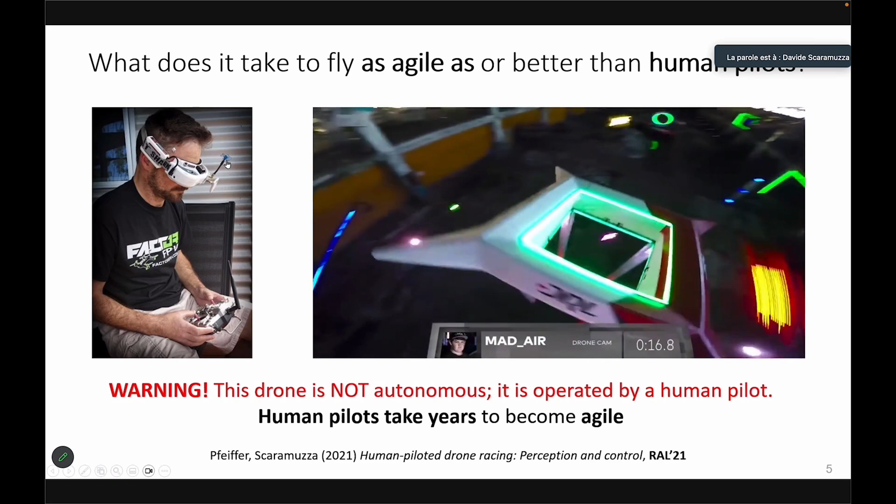So what is it that we try to do in my lab? What I try to do is understand what it takes to fly autonomous drones as good as, or even better than, human pilots.

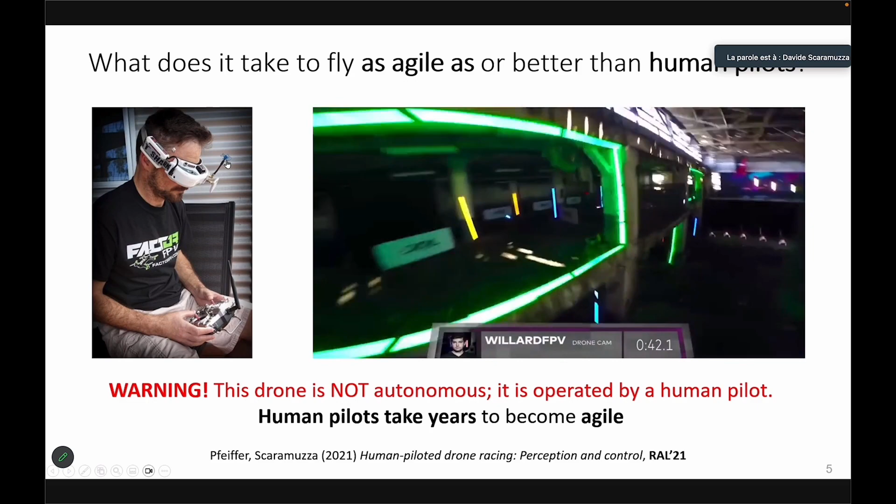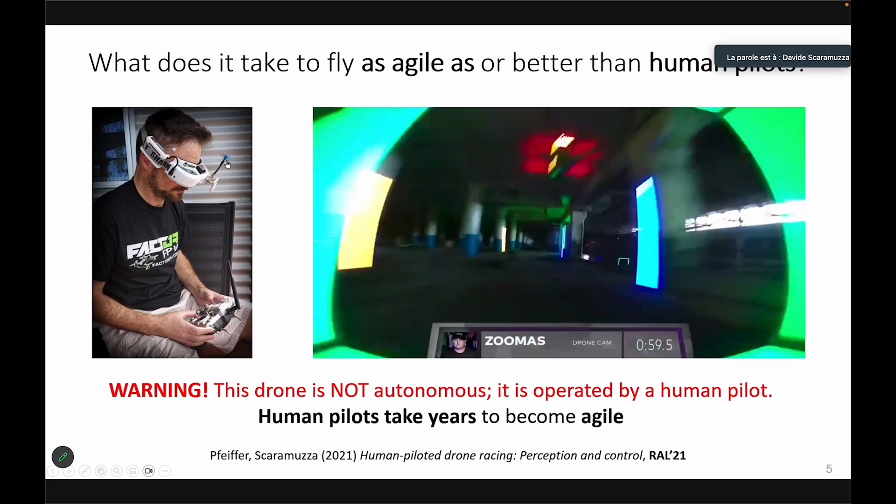What we see in this video is not an autonomous drone, but a drone piloted by a human. Human pilots navigate drones vision-based: they put a camera on the drone that transmits low resolution video, the brain processes the information recorded by the camera, and then sends control commands to the fingers that act on the joystick.

Now, what is interesting is that human pilots take 3 years to achieve the skills that you just saw in this video.

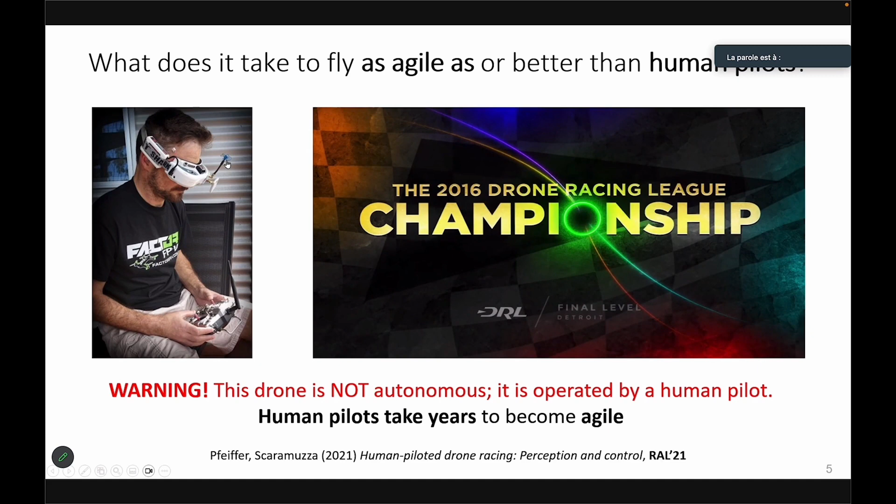Now, we thought that human pilots were fast simply because of their reaction time, and we were wrong. In fact, the average reaction time of the best human pilots is about a quarter of a second, 250 milliseconds. That's quite a lot of time, 150 milliseconds of which is the time it takes to go from the latest sensor input to the control commands being issued.

How do you measure this? You quantify the reaction time of extraordinary pilots using high-speed cameras, and this was published in the paper you see here below.

So our best autonomous vision-based algorithms are 10 times faster than experienced human pilots, but human pilots still beat the machine. Why? Because humans are still better than machines nowadays at making decisions in complex situations.

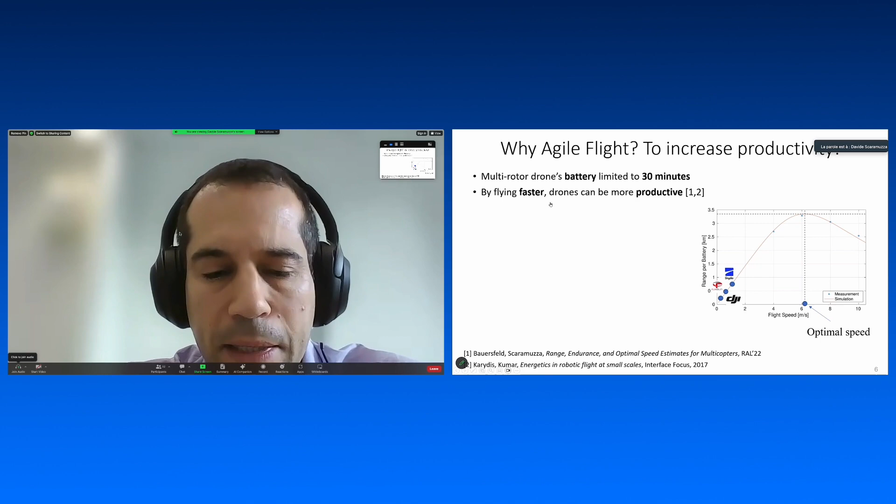For example, the average inspection of a structure requires swapping the drone's battery 50 times. If you can fly the drone faster, you only need to swap the battery 5 to 10 times. Meanwhile, racing drone pilots sit on the opposite side of this curve, because they're not maximizing productivity, they're minimizing net battery use for speed.

Nevertheless, I believe that through our research, we can push these things forward without manual intervention, and that's why we've worked over the past years to make progress on this.

Which applications will benefit from more agile drones? Many applications. First of all, search and rescue, because any time we can save can save lives. But also exploration and inspection - these are applications where it's important to increase drone productivity. Also forest management: more and more drones are being used to inventory forests, measure diameter and density, draw perimeters to avoid deforestation, and even distinguish tree types.

Also personal air vehicles - there are two big companies working to professionalize the field of passenger air transportation, and we need to fly fast to increase productivity there. And also space: according to NASA, their helicopter that will fly on Mars by 2030 needs to fly for 20 hours, and in order to do so, it will need to fly fast.

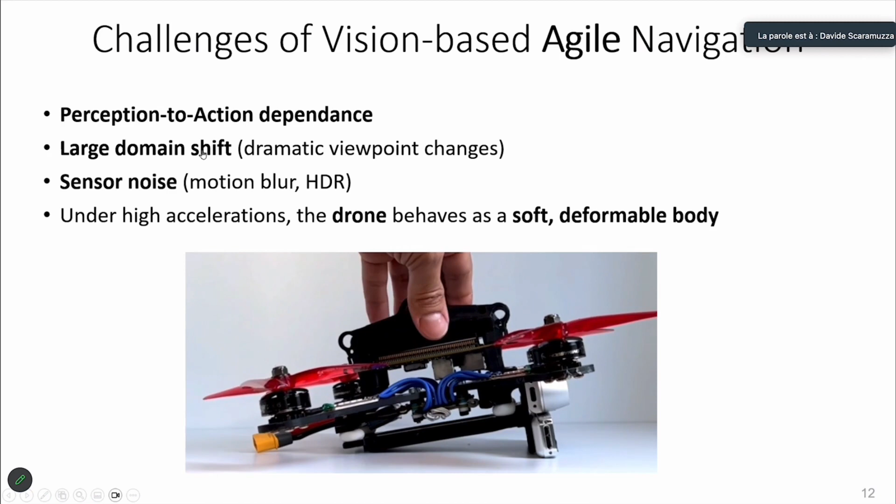Overall, many people think that a drone is a rigid body system, but this is not convenient to assume. Actually, a drone is a soft robot under high acceleration. Why? Because to isolate the vibrations between the motors and the cameras, we need to use soft mounts, like you see in this picture here. If you push the drone—and this is a recipe to simulate the accelerations the drone will experience when flying super fast—this will cause deviations in the calibrated extrinsics between the camera and the body frame.

And these systematic errors in the calibration, which is impossible to model perfectly, can cause errors of up to 2 meters. So there are many challenges you find with obstacles and perception.

Let me show you a video of drone racing in our arena. So actually, to do the experiments for this talk, we had to build an arena.

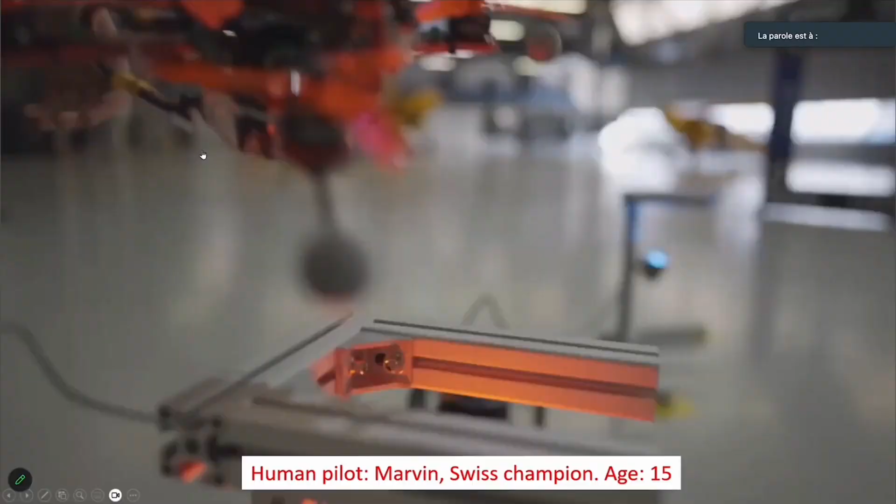So as you can see, the sport is very challenging because you need to push the drone to its limits. Eventually we will crash, because if you don't crash, it means you haven't pushed it to its limits. That's also why it's very difficult to do agile drone research: we crash many times.

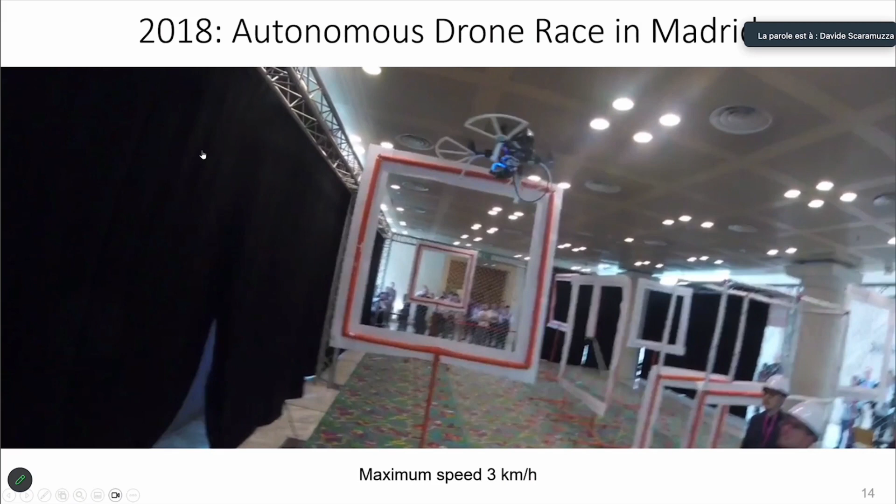We started working on racing in 2016, but only in 2018 did we reach something considered the world's best in terms of autonomous drone racing. In fact, in 2018 we participated with IROS's autonomous drone race summit in Madrid, and at that time our maximum speed was just 3 kilometers per hour. Nevertheless, it was faster than the other teams.

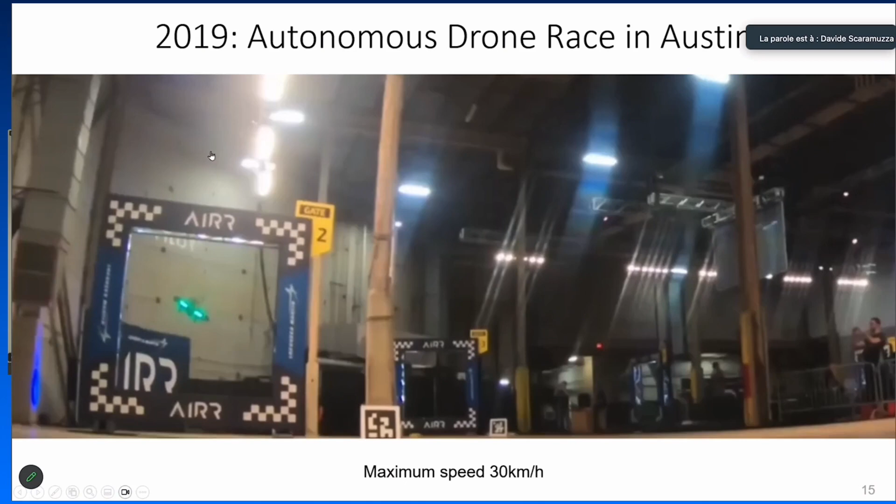One year later, as a team we participated in the autonomous drone racing challenge Alpha Pilot in Austin, Texas, where our maximum speed was 30 kilometers per hour. So in just one year, we were able to improve the speed by a factor of 10.

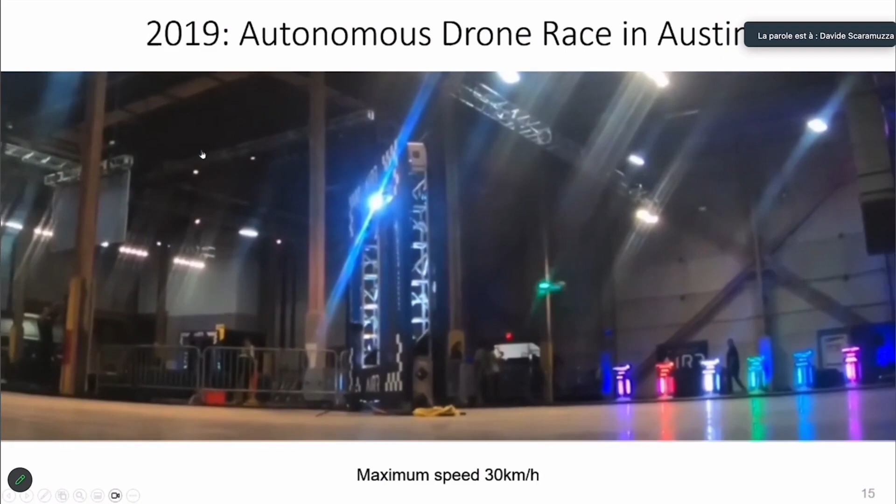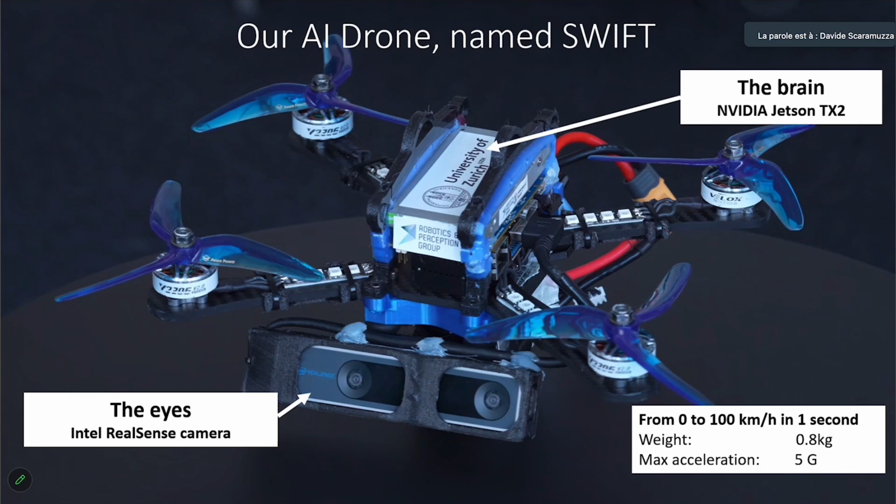But we realized that we were still very far from human pilot performance, and there are many reasons why. First of all, we were not using components that are used in real drone racing competitions. So we reached out to expert drone racing pilots and asked what specifications we needed to build a truly agile autonomous drone. We call this drone system Swift.

It's about 20 centimeters in diameter. It uses an NVIDIA Jetson TX2 as a brain and an Intel RealSense camera as the eyes. Consider that drone pilots, when they navigate using vision, only use one camera, so Swift will also be using only one camera, to match the same competition-based experience.

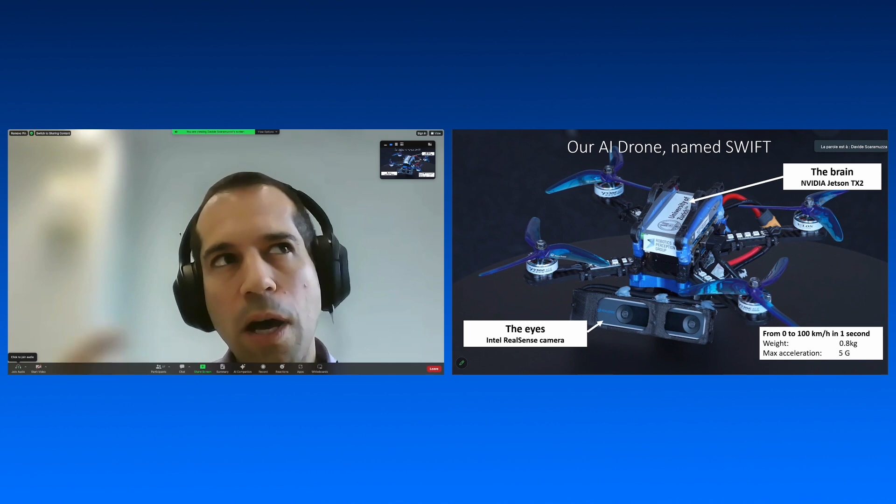Swift is very agile. It can accelerate from 0 to 100 kilometers per hour in less than one second, making it faster than a Formula 1 car, which takes 2.6 seconds. Swift can also reach accelerations up to 5 Gs, which is much more than what astronauts experience when launched to the International Space Station, about 1.5 Gs.

But besides the hardware, what actually made the difference was the software. We had to rethink the entire pipeline completely. Before, the pipeline was designed as perception, then planning, then control, and we had to change everything.

So let's formally define the autonomous drone racing problem. What is autonomous drone racing? You want to find the control inputs that optimize the flight time through a series of gates to be passed in a given order. So what you want, for example, is to minimize the lap time, subject to several constraints, like system dynamics, input constraints, state constraints, physical constraints, and, very importantly, perceptual constraints.

Why perceptual constraints? Because you want the flight to be vision-based, so you can only fly trajectories that facilitate the perception task, whether it's using perception for detecting the gates, and also because you want to pass through the gates, so you constantly need to make sure that the camera faces the gates over time. But as I told you before, there are sensing and motion blur threats, so we can alleviate them if we actually plan trajectories that reduce motion blur and obscured views.

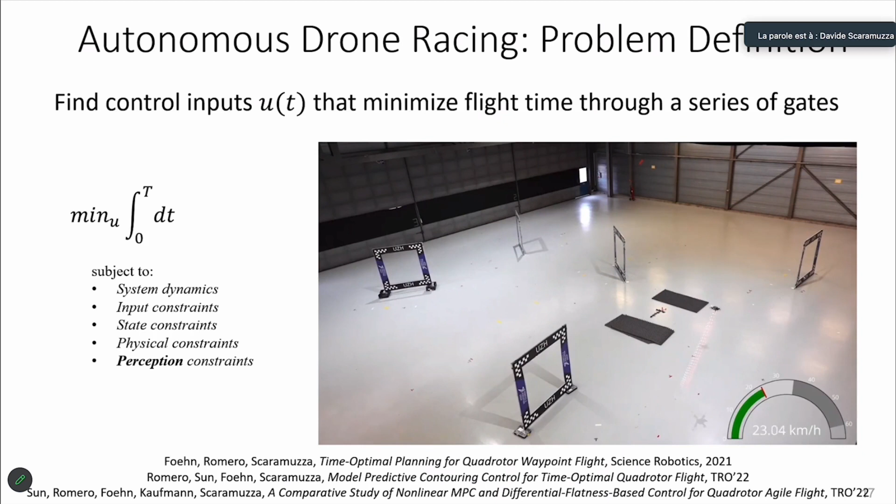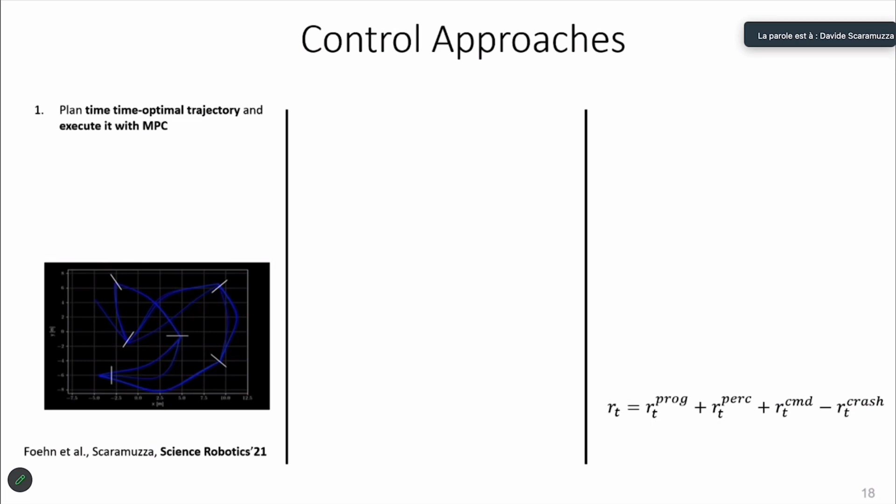When we started working on the autonomous racing problem, we started working not on neural networks, not on machine learning, but actually on standard classical things, on actual control theory. We thought of solving the problem by components, from speed planning and so on.

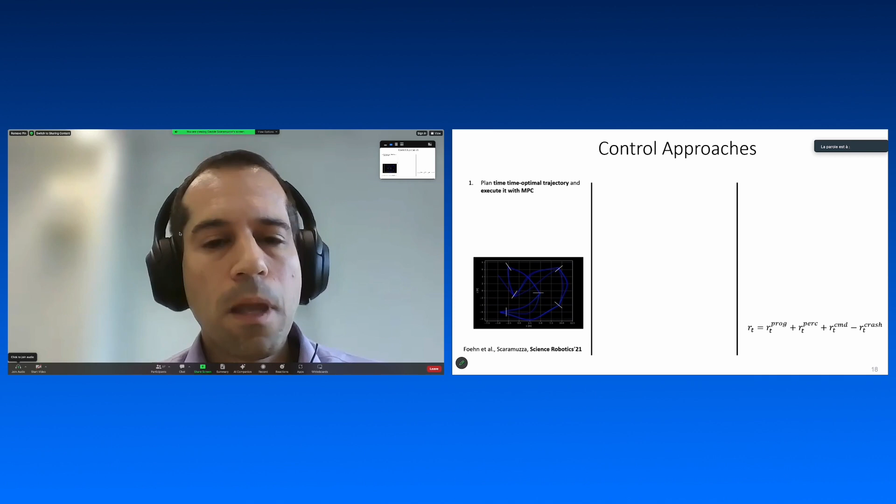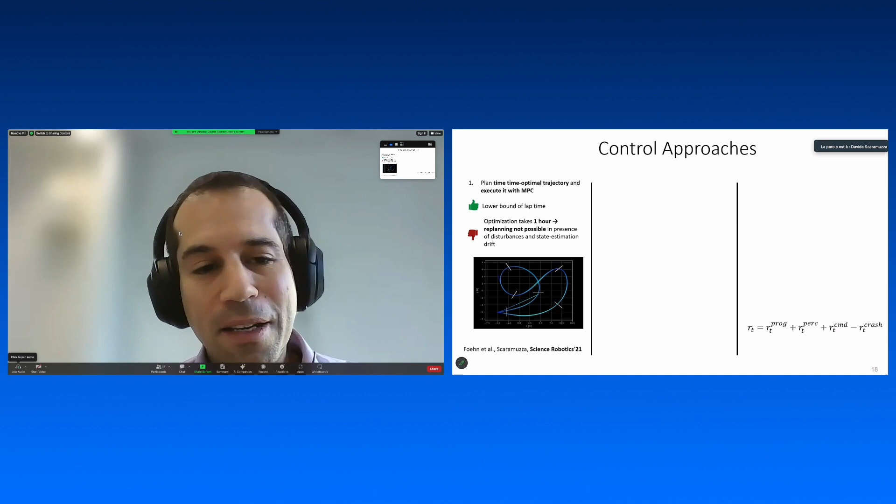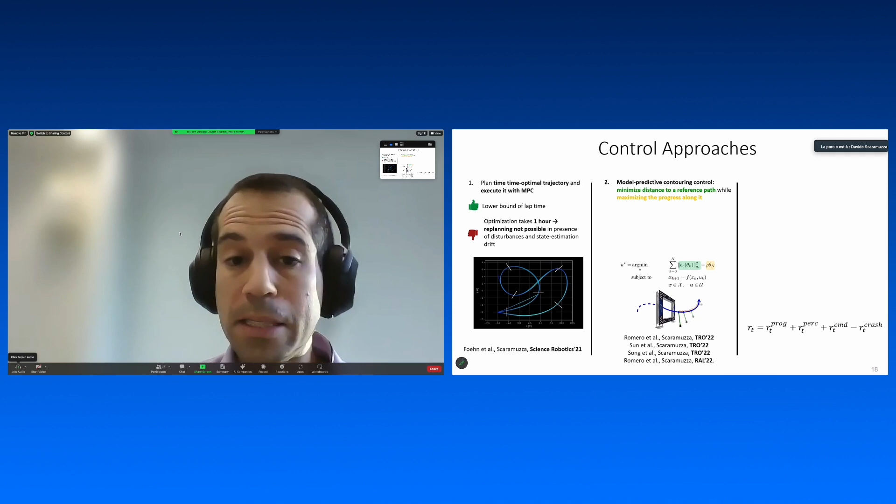So the PhD students, over 3 years, developed a replanning algorithm, also based on optimal control, in particular on model predictive control, that allows you to relax constraints and fly optimal trajectories, requiring only 2 milliseconds for replanning. So replanning was possible in 2 milliseconds rather than 1 hour, but the performance was still inferior with respect to human pilots.

In the face of disturbance and more uncertainty, which are the biggest challenges, we really needed to look forward. So after working for 5 years on optimal control, 2 years ago we made a drastic change.

Motivated by a PhD student who had been working on reinforcement learning, he showed us that reinforcement learning could outperform optimal control. I will talk about this. It's reinforcement learning that maximizes a task-level objective, allowing the discovery of robust control responses, assisting in settings where small disturbances could lead to catastrophic failure. So now, basically, what allowed us to defeat human pilots was reinforcement learning.

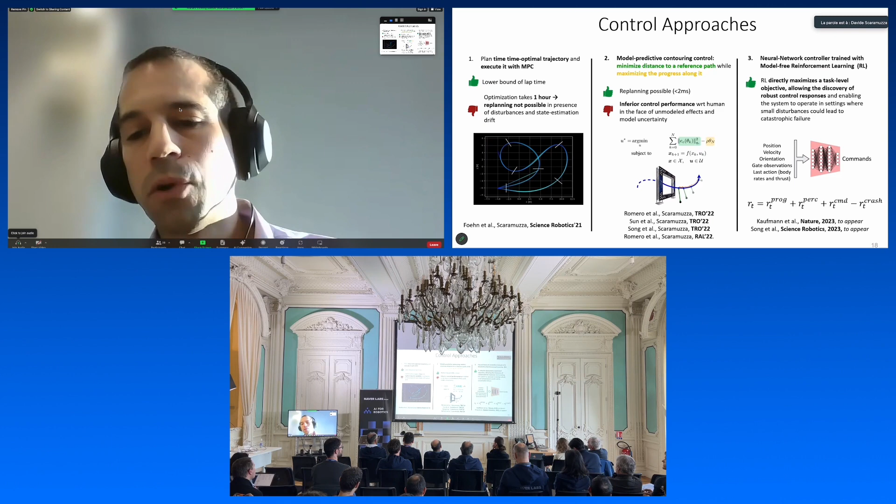It takes as input the state, and the output is the control commands. The same control commands are sent directly to the drone, as if on a joystick.

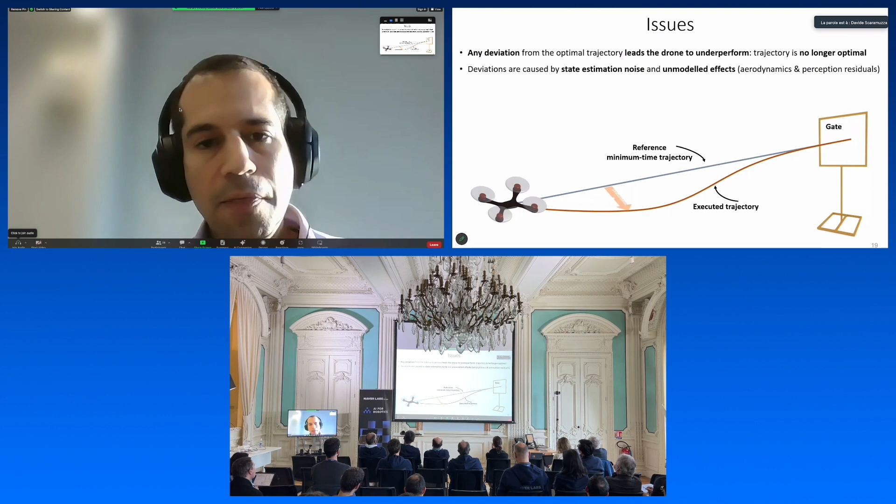Why do we like to resort to reinforcement learning? Because standard controllers are very sensitive to unmodeled effects, like estimation drift, aerodynamics, and perception residuals. You see a sketch here—the blue trajectory is the guaranteed optimal trajectory that would guarantee superior performance. But this optimal trajectory is optimal only if you can track it with high accuracy. In practice it will fail because you don't account for as much of the disturbance in real systems. So any unmodeled effects need to be compensated for around the optimal trajectory.

Now, the system uses onboard estimation provided by a single onboard camera. How does it work? It's a visual odometry pipeline plus a gate-based pose estimation. The visual odometry is fairly standard, as you already know. We also have to deal with motion blur.

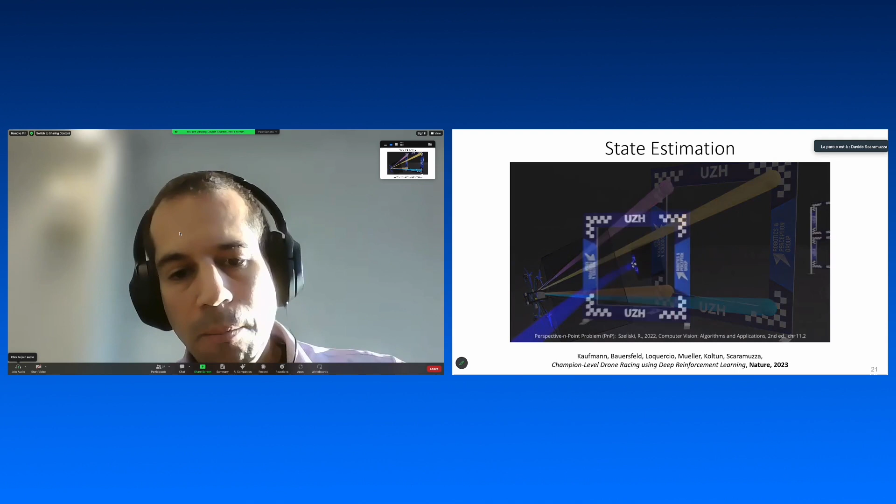we have to correct that drift with map-based localization from observation of the gates. So we have a neural network that detects the gates with its key points. And then we have an algorithm, a perspective-n-point algorithm, that estimates the position and orientation of the drone with respect to the detected gates. But as you may know, it provides accuracy that scales quadratically with the distance from the gates. So when you map the ellipsoid of uncertainty, you can see here that it's actually quite big.

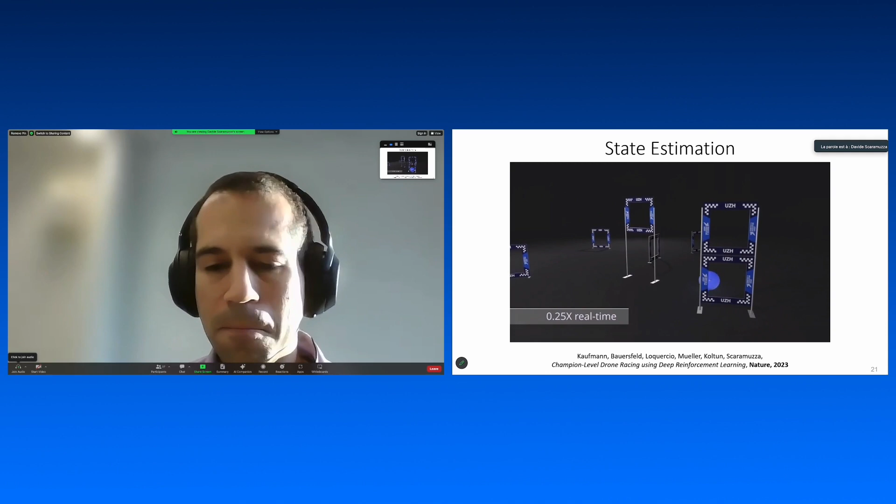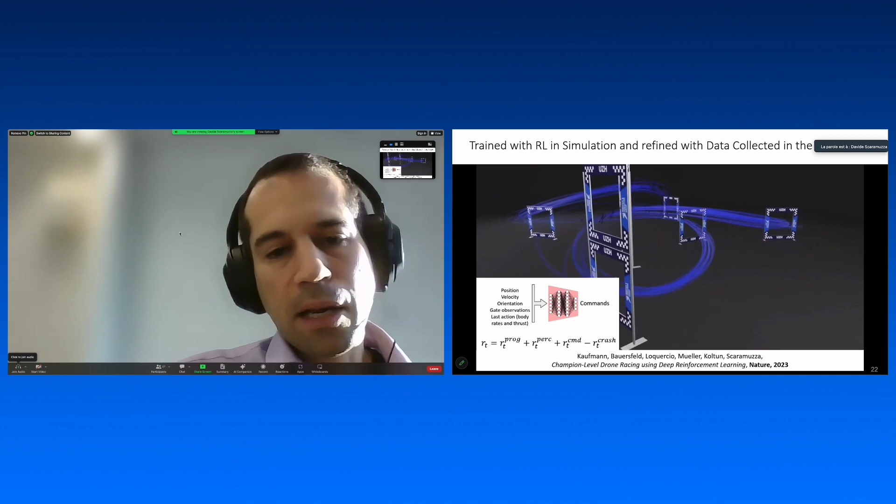We do this by maximizing a reward function that consists of 4 terms. The first term is the progress term. You want to favor policies that maximize the progress over the track.

You also want to favor policies that favor perception awareness, so that the gates stay clearly visible, centered in the camera's field of view.

Third, you want to favor policies that are continuous with the policy's output at the previous state, for smoother control of the controller. And finally, you want to penalize crashes.

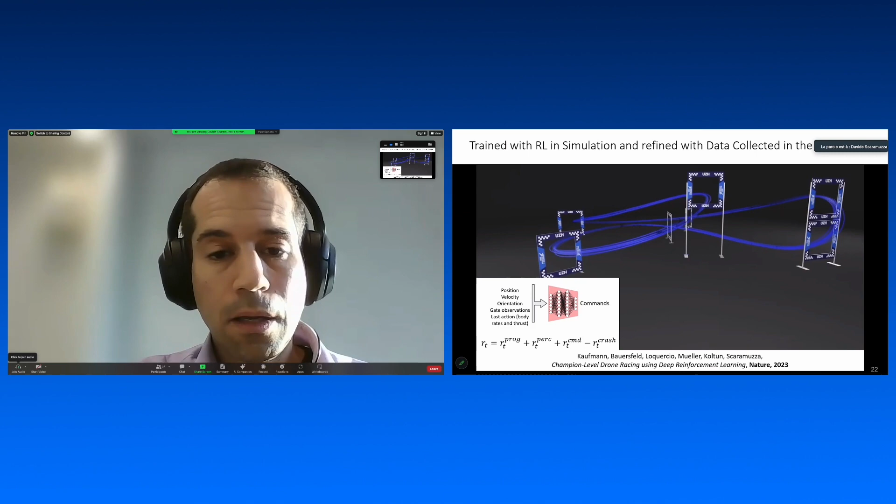The important thing to remember is that they used the same hardware. We built the autonomous drone according to the specifications of the human champions, and the autonomous drone was identical to the drones used by all three parties.

They had the same aerodynamics, the same weight, the same size, the same camera, the same field of view. The only thing that differed was the onboard computer, but we balanced the weight accordingly. So it was a fair race.

Then we let them race head to head on the racing track. We wanted to give the human pilots the same adrenaline they experience in a normal competition, so they invited family, friends, and students — about 1,000 people.

Now I'm going to show you the video from the perspective of the human pilots. Swift is colored in blue, and the first of the challengers was Alex Vanover from the US, colored in red. And so it begins.

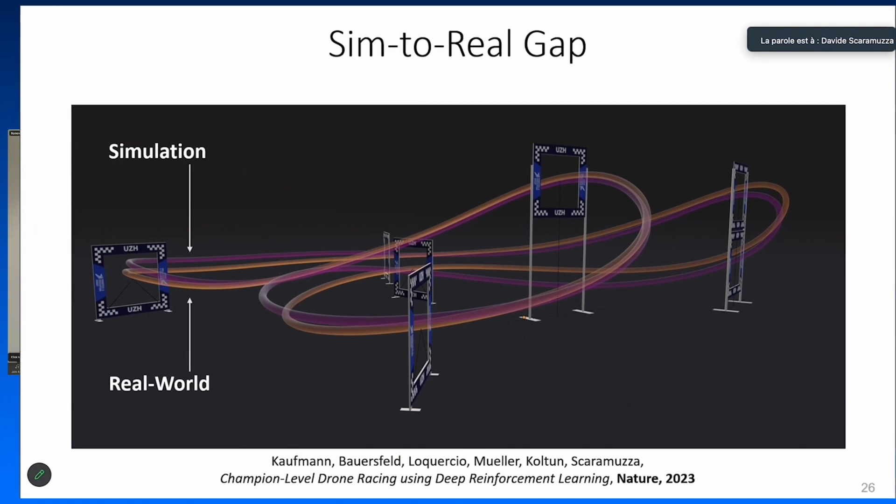Now, was training in simulation enough? No. What you see here is a comparison of simulation to reality. What you see in purple is the trajectory flown in simulation, and the one in orange is the one flown in the real world.

We have a turbulent flow — we don't have laminar flow — and the forces and torques the drone experiences when flying at these high accelerations are very hard to model accurately. One way to model aerodynamic effects is through computational fluid dynamics.

But we can't use that, because it can take hours to compute for a single inference. Instead, we model the systematic effects using a statistical approach.

Remember that I told you the system acts like a soft robot? Well, those systematic errors are impossible to ignore — they can cause errors in the estimation of actual quantities. So it was not enough to train the neural network controller in simulation; we also had to fine-tune the policy using data collected in the real world.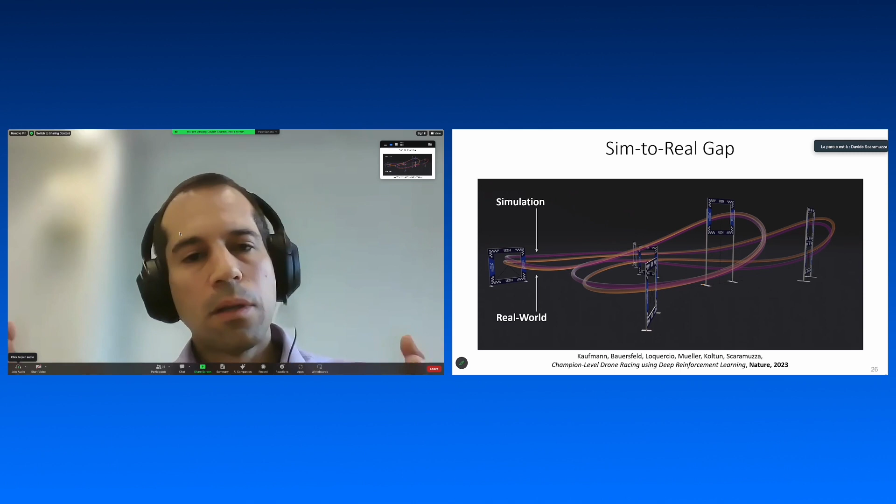So this is the takeaway of the initial paper: simulation is not enough to push robots to the limits of handling, but we need to capture data in the real world. So what we train upon is training in simulation. When you deploy to the real world, you observe the gap between the real trajectory and the predicted trajectory from simulation.

As I said, these residuals are perception and actuation effects, and they're very difficult to model because they depend on the full state. They are specific to each location in the environment. So anyway, the standard for deploying the learned policy in the real world is that we use motion capture to avoid these effects.

And then we use captured models to model the residual effects. Then we go back to the simulator. We use these models to build the simulator, and then we fine-tune the policy in this new simulator. After this is done, we go back to the real world. We deploy the policy with vision-based and onboard computation, onboard sensing in the real world. So we will show that system. This sim-to-real pipeline is what allows us to close the gap.

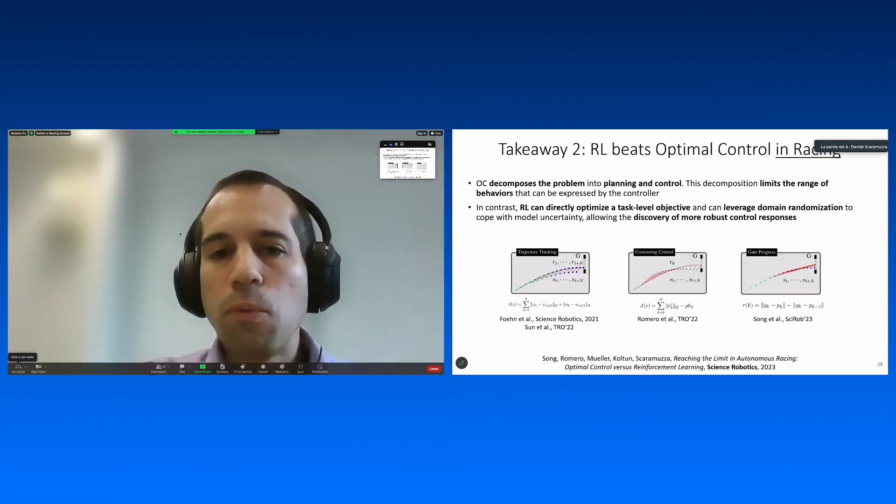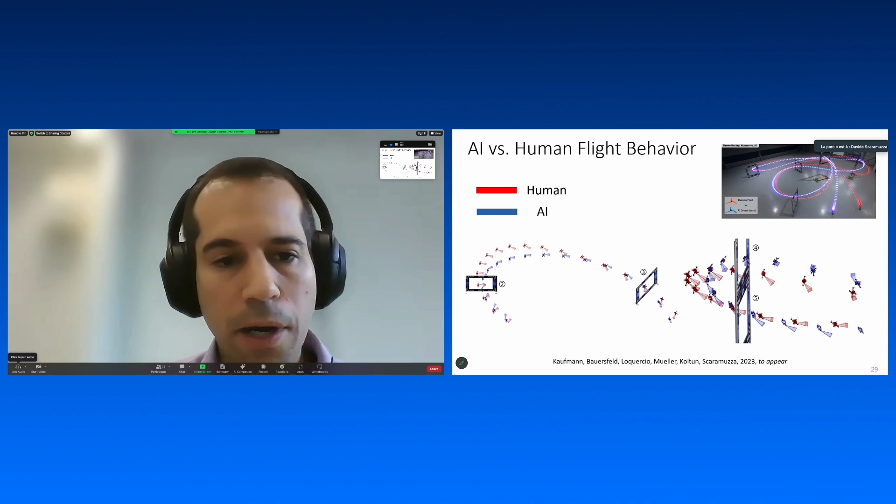Now, what led the AI to outperform humans? Which behaviors did it discover that the human did not discover? Well, in general, the AI flew obviously shorter trajectories than the human - you can see clearly here on the left, there are much shorter paths in the group that it flies. On the right it's even more visible, because the drone has to pass through the top gate and then pass the next gate. These moments are really significant and take time to analyze.

What you observe is that the human overshoots more than the AI. Pay attention also to the direction of the onboard camera. What you observe here is that the human is looking away from the gates before exiting, while the AI keeps it aligned. Let's use these visualizations to show it - here it's the AI versus the human.

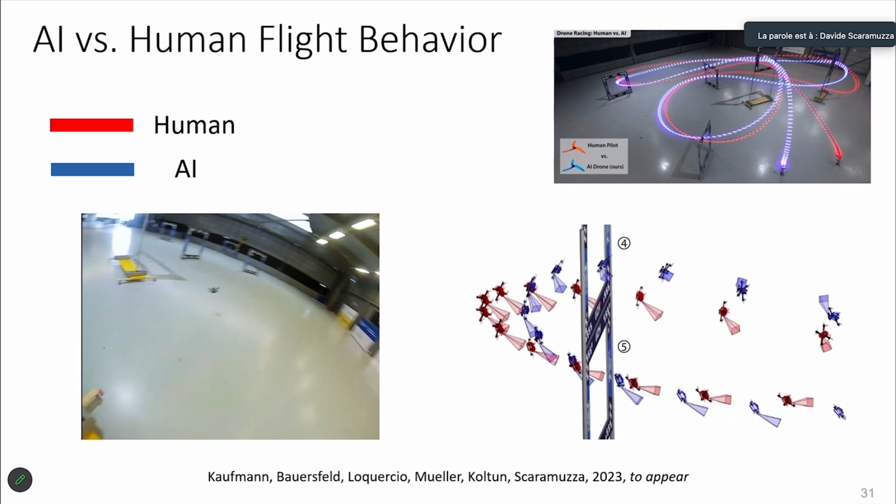And you can see, for example, the onboard camera aperture - it's not a very standard maneuver because strictly speaking, the AI always performs a half roll followed by a half pitch, in order to orient the camera towards the next gate before passing the top gate. So that's why it's super fast.

So does this mean now that the game is over? Does it mean that AI is better than humans? Absolutely not. There are many challenges still ahead. One challenge is having robustness.

So as you can see, on the field we had a lot of fun testing those. But that's where the humans shine. Humans generalize better and can even work out solutions to new problems.